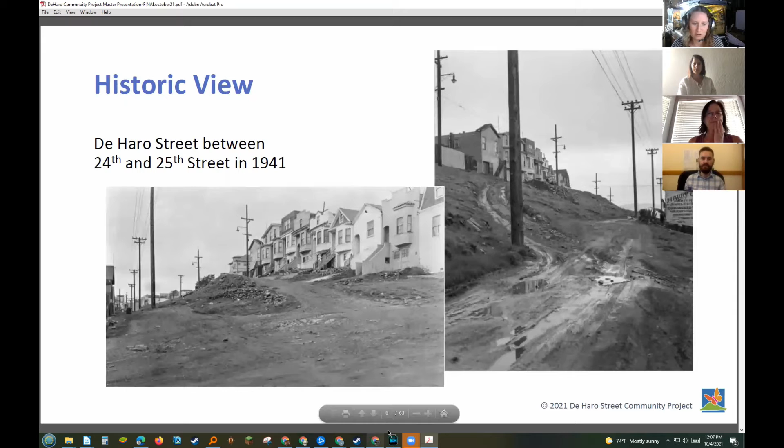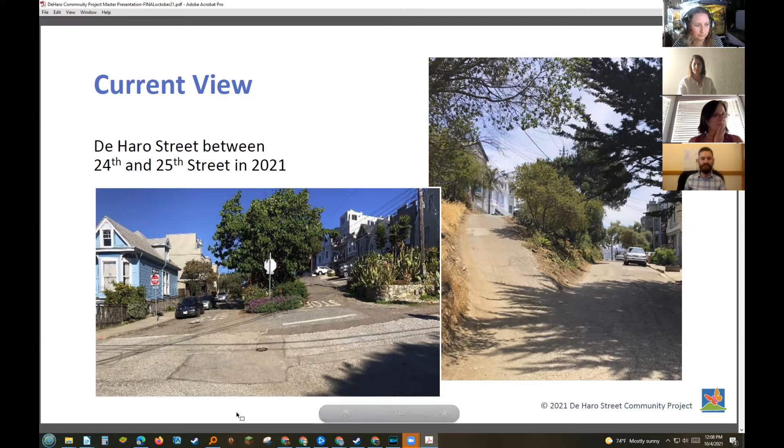So our holistic vision, multi-phase project, in collaboration with our steering committee, comprised, well, you know all of that. We've worked with Terrain Studios to develop a multi-phase master plan. Each of these 4 phases is independent and autonomous in scope and addresses key improvement requirements. All 4 phases are in service of a holistic goal of creating a seamless, interconnected green belt that serves the larger neighborhood, fostering a more beautiful and functional pedestrian-friendly community.

Phase 1 is what we are applying for the Community Challenge Grant for, and it addresses erosion and drainage issues while significantly enhancing the beauty and sustainability of the hillside, which also connects Upper and Lower Haro with new stone face steps and a gravel path. Elements include drainage, retaining structure, decorative gravel, low flow irrigation, initial drought tolerant planting, and landscaping.

And then the other phases, which we would be applying for next year, phase 2 anyways, continues to improve the median and is also a community challenge grant. Phase 3 and 4 address more infrastructure issues, and we'll have to work with the Department of Public Works on that. Ultimately, the goal is to complete this green belt walking pedestrian path, and also at the same time makes Upper and Lower Haro's accepted streets, and sort of fosters this beautiful entrance to the Starr King open space.

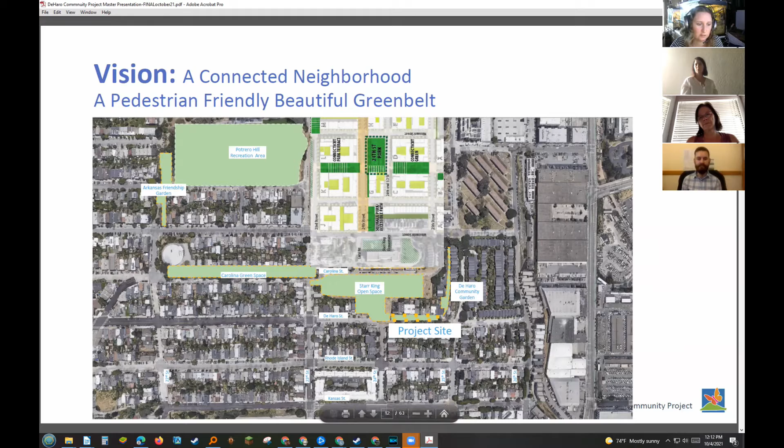So it's this beautiful circular walking path, which we want to make even more functional with our project. And safe, I would add. Yeah.

Here's an overview of the master plan. Terrain Studios created this beautiful diagram of what we're suggesting, which ultimately over the course of several years would make Upper and Lower Haro both accepted streets by dealing with the width issue, the sidewalk issue, and the ramp, which is extremely unsafe and narrowing by the day, especially now that the city has made Lower Haro a one-way street. So traffic is being forced on Upper Haro, which is further degrading the roads. The ramp is visible in the background here.

Terrain's vision was to do what was originally planned in the city planning, which is to carry it through to 24th Street. So that was the vision that we came up with after a year of research and brainstorming.

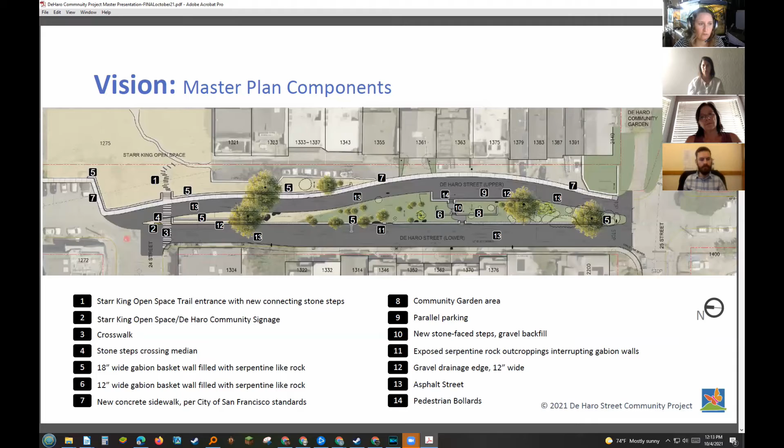But these are all 4 phases of the plan. For phase 1, which is what we're applying for this year, we have in yellow the Lower Haro beautification project, which essentially involves what we're going to talk about. Then the second phase next year would be further terracing and planting, phase 3 would deal with the lower street, and phase 4 would deal with the upper street.

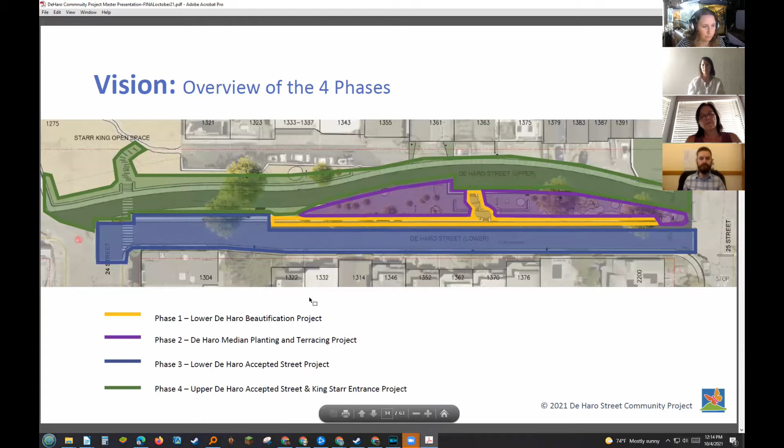So phase 1, the components are putting in gabions to retain the hillside and provide a wall that will hold back the soil from falling into the street, which makes the street narrower. But it's a wall that allows water to permeate through to encourage proper drainage. Also, the steps would be started so that we can access the different levels of the street and create a beautiful walking path.

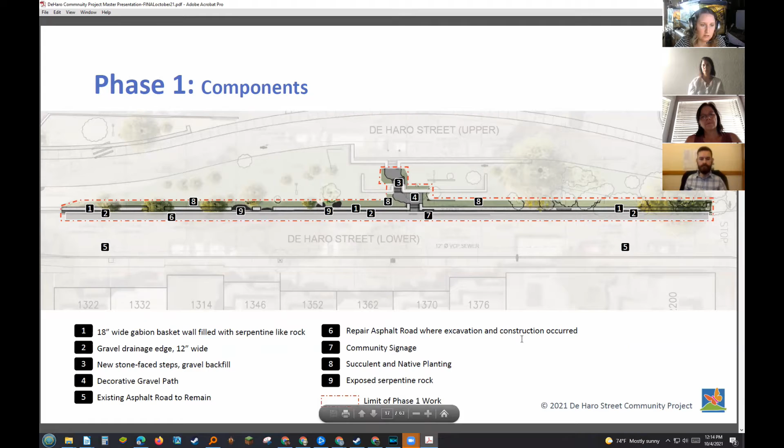So those are some of the issues addressed by phase 1: dealing with the landscaping, dealing with the irrigation, which I don't think we talk enough about in this presentation, because our intention is to apply for the PUC irrigation grant - I can't remember the name of it at the moment. But that's a major part to this, because we can't keep any of these plants alive, the plants die and the soil erodes, and then our street gets narrower and narrower, and it's just unsafe. So these are some of the issues that are going to be addressed by phase 1, which we are hoping to get the community challenge grant for this year.

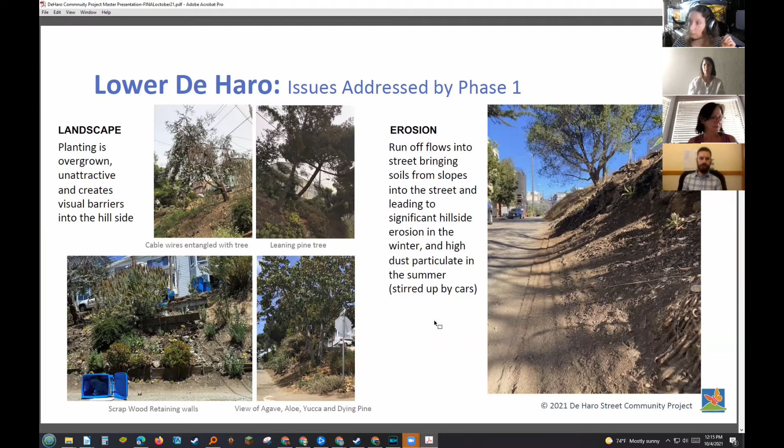You can see these are just some highlighted pictures of why we need the gabion wall, because there's this continuous erosion of the slope. And if we ever do get rain again, it makes for a pretty difficult street to drive on when you have this mud that covers half of it.

Quick question on that photo, sorry. If you go back to the photo on the right, if you had that gabion, you kind of got rid of some of the erosion, some of the dirt. Under that dirt, is that asphalt or concrete, or is some of that just dirt and hasn't been paved?

So the really interesting thing is that when the street was paved decades ago, there is more of the street underneath this soil flow. Just out of curiosity's sake, we've dug it back, and so there's definitely a road lip. Our intention with the gabion is we're going to go back into the hillside, so where this board is in this photograph, that's about where the gabion would actually start. Then at the base of the gabion, there would be about 12 inches of gravel drainage, and then the road would start, because we need to have the drainage so that the water is diverted and doesn't just flow over the road. So that's great though, too.

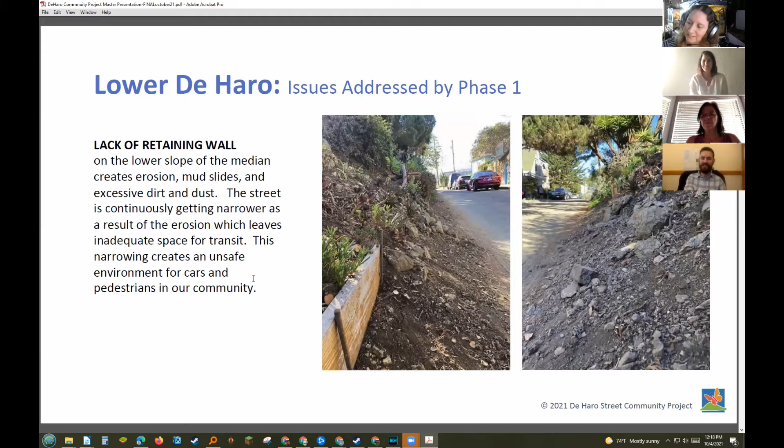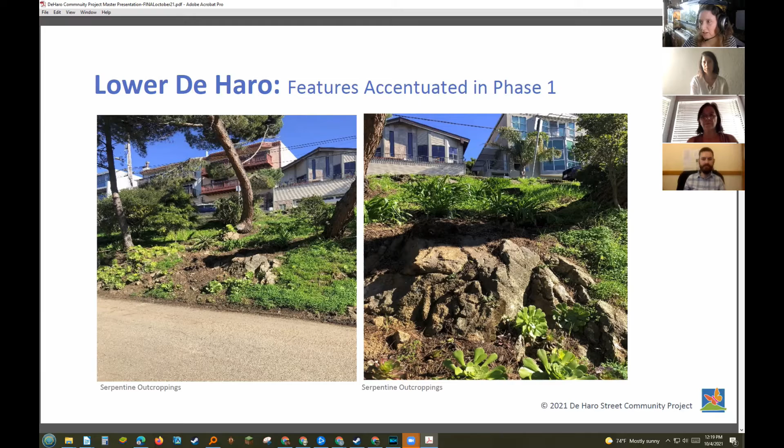So a few of the features, we've got this beautiful serpentine rock that outcrops from the hillside all over the place here. We've taken that into consideration in our design so these features will be accentuated and not lost. The overall vision is for something like this, where we have a safer road and safer pedestrian and bicycle traffic, where everybody can enjoy the beautiful green space we're lucky enough to have. There are fewer and fewer green spaces in San Francisco, and we should bring it to its potential so we can all enjoy it.

The benefit to the gabion, in addition to allowing water to permeate it, is you can also plant in it, so after a couple of years it's going to look so beautiful. This is a mock-up simulation that Terrain provided of what we're potentially looking at: safer, wider streets, new planting and access path, with the existing curb and sidewalk remaining.

We went through a lot of iterations of this project, and in a few of them we were taking away parking spaces, but we came to the conclusion that we don't want to take anything away from our neighbors, and we don't want to give anything up. We just want more. So this project, as it is right now, doesn't take away—it just gives. That's one of the things we're really proud of.

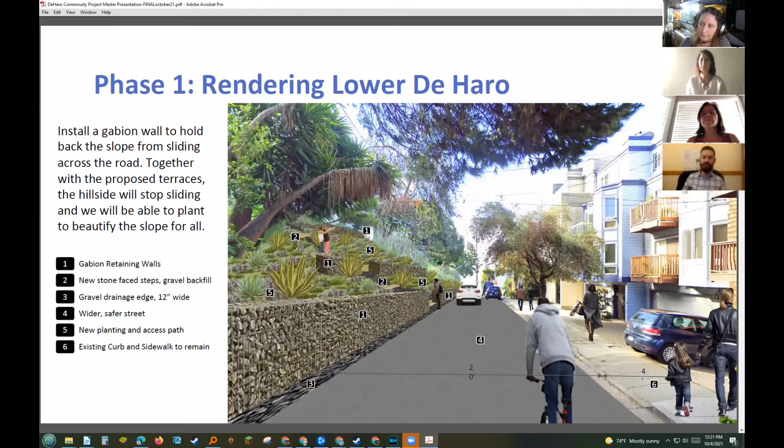Sticking to the rules of it being a one-way street, it's easier to widen—it takes up less of the median. So we would have it be 12 feet for transit, 8 feet for parked cars, 4 feet for pedestrian. Terrain's been very clear that that's what we have to hit to become accepted, so this hits that. There are some diagrams later on that go more into detail on that specific issue.

So here's our budget, taking into account the CCG grant and the fact that we have to match 40%, which is scary. The budget is at 139,000 just to do this. Of course, the CCG grant only allows a certain amount towards construction costs, so that's also something we took into account during the division of phasing.

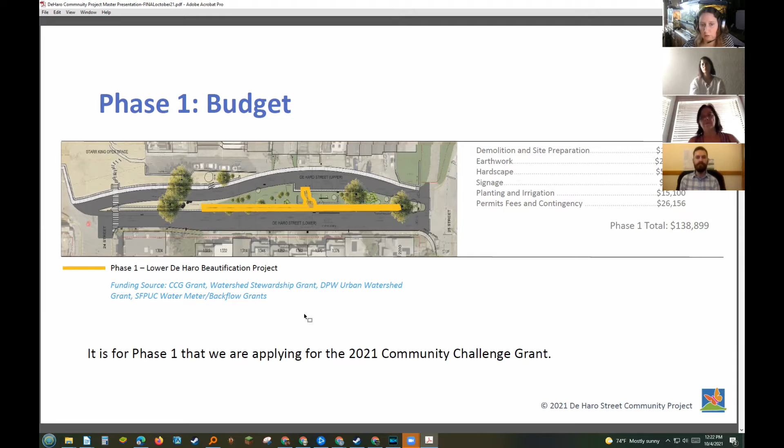In some ways, it would be more economical to do the gabions all at once, including on the upper street and in the center, but we just can't make the numbers look right while still qualifying for these grants. That's why we've broken it up the way that we have.

Again, this is our presentation for the CCG, so it's in that format, but we can just sort of jump ahead. Get my cat off the counter again. There we go. Yeah, you don't have to.

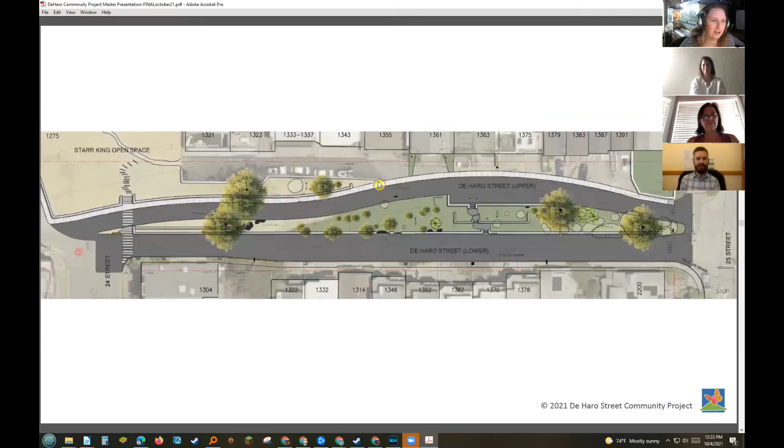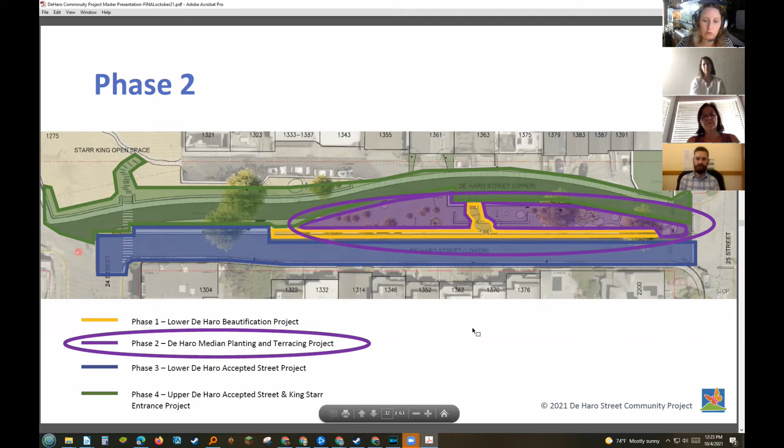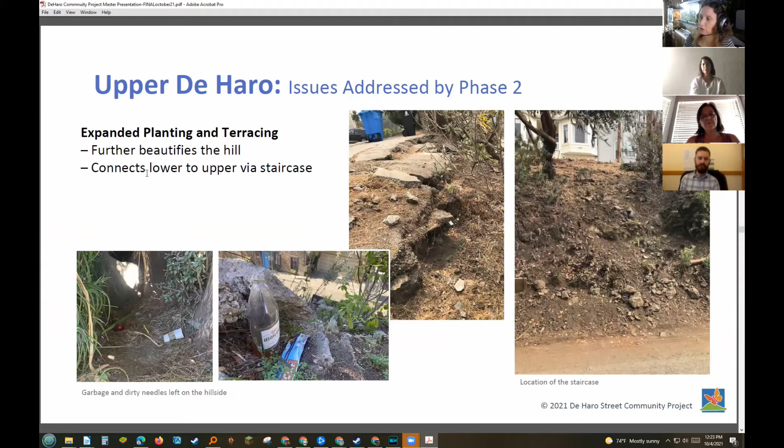Okay, so phase 2 is interesting. Again, dealing with phase 2, we didn't want to just talk about phase 1 in our proposal. We want them to have an idea of everything that's coming down the pike so that they can see how considered this whole development has been. Phase 2 is also a project we would be applying for a CCG for, which further beautifies the hillside and finishes the stairs all the way through, while also dealing with the upper De Haro erosion issue and the garbage issue.

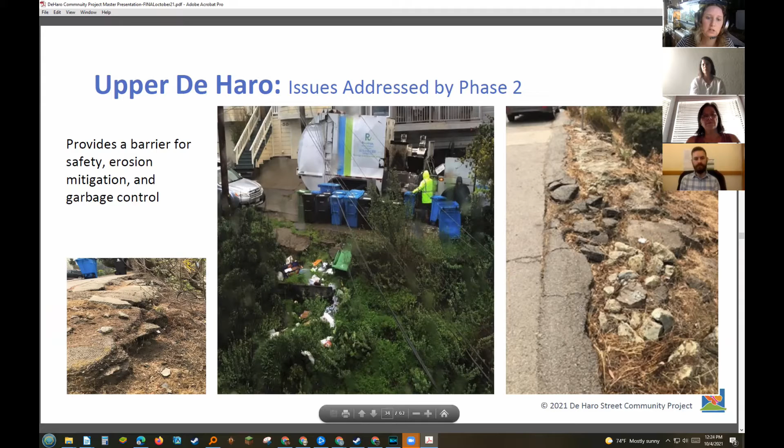Here's a rendering. Originally, when we started working with Terrain, they had this beautiful concept of using cobblestones, because 24th and De Haro is one of the last cobblestone streets in San Francisco, and it's just beautiful. In their original plan they included the cobblestones, but because of our budgetary requirements we had to nix that aesthetically pleasing but very expensive part of the project. But there's no reason we can't do that down the line if we somehow had lots of money.

Street repair becomes easier with pavers because you just pick them up. These cobblestones are actually pavers, yes, and the street would be easier to repair and maintain with pavers because you just remove them.

In any case, the rendering of Upper De Haro, we would have a short retaining wall, gabion wall, all along this edge, as well as a street wide enough to be accepted, and we would have to install sidewalks in order to be an accepted street on Upper De Haro.

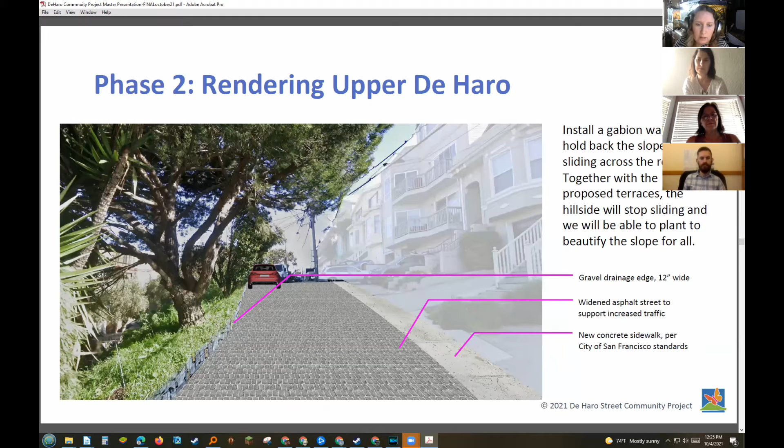So the gabion wall would hold back the slope. Here's our gabion wall up at the top, as you see it's really only at the worst of the area, where the street is really collapsing. The idea is that backfilling underneath the road and installing the gabion would help prevent that erosion.

And we would deal with the mid-level gabions as well, which terraces the hillside to make it more beautiful and more accessible for plantings and the like.

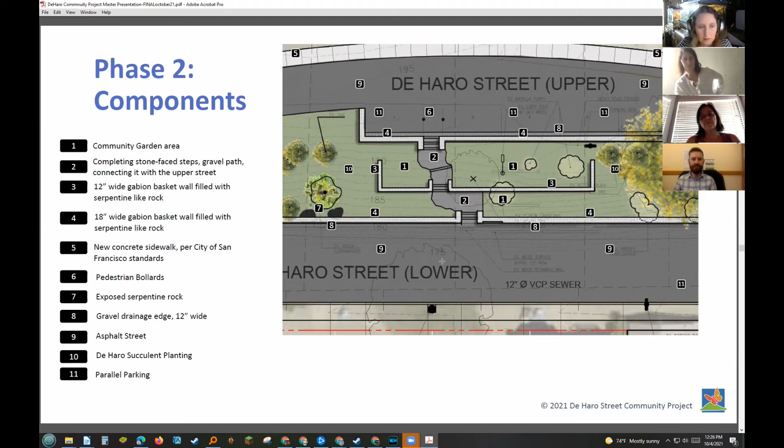We would install a couple of pedestrian bollards to keep people coming up the steps from being hit, and to prevent cars from parking right there and blocking it. So that's an important part of phase 2: safety for our community.

So this is the budget for phase 2, which encompasses the purple areas. Keeping into account the 40% match and the limited percentage of funding that can go towards construction, we have our budget at 105 for that part of the project, which we would request a CCG grant for.

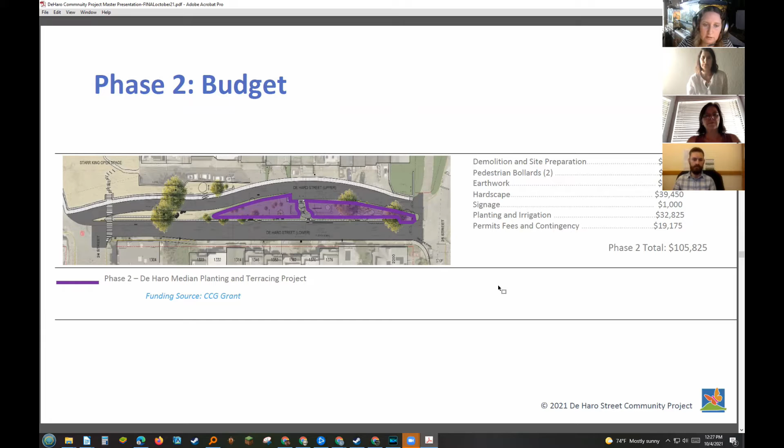Looking at the big picture, the issues addressed in phase 3 and 4 are the unsustainable infrastructure we have, like the edge of the asphalt being unsupported and in poor condition and eroding down the hill, as you know from meeting with us so many times, Abe.

This would address the lack of gutter at the base of the slope, which allows runoff onto the road. Current street widths would be addressed in phase 3 and 4. Right now lower De Haro is 16.5 feet and upper De Haro is about 12 feet in width. These would be addressed during phase 3 and 4 so that we could be under consideration for being accepted.

The other part preventing us from being accepted is the dissecting portion of De Haro, this crazy ramp that's quite narrow, so much so that garbage trucks, fire trucks, and emergency service trucks do not want to drive on it because of the liability and the collapsing edge. Because of that, that's really part of stage 3 and 4 that needs to be addressed, as well as a major factor preventing us from being accepted, because it's a public safety issue.

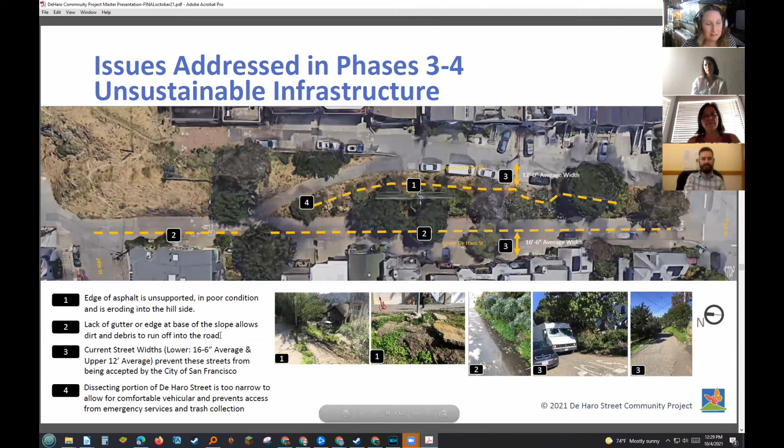It's scary. The people on Upper De Haro have limited access to emergency services because the vehicles don't want to go up there. Recently we had a situation where PG&E had to come out because construction at the end of De Haro, I think it's 1321, hit a gas main, and that was really scary because the fire trucks could not get up there. Luckily it worked out, but still pretty scary, and that's something we want to take into consideration in our plan.

So this is sort of the master plan idea. This is the ramp currently, and instead it would go along here, extending the median out to 24th Street. One of our neighbors expressed concern that she'd be looking at roadway out her window instead of the unplanted slope she currently looks at. But in actuality, because this median would be brought all the way to 24th Street, there would be quite a bit of green, trees, and plants that could obscure the road.

Anyways, those are all solvable problems in a plan that ultimately makes it safer and more beautiful for everybody.

So stage 3 and 4, here's the other end of De Haro towards 25th Street and what it would look like. You see the street is wider, the sidewalk is there. The drivable surface has to be 12 feet, and the sidewalks have to be there in order for it to be accepted. So this is how we are suggesting solving this.

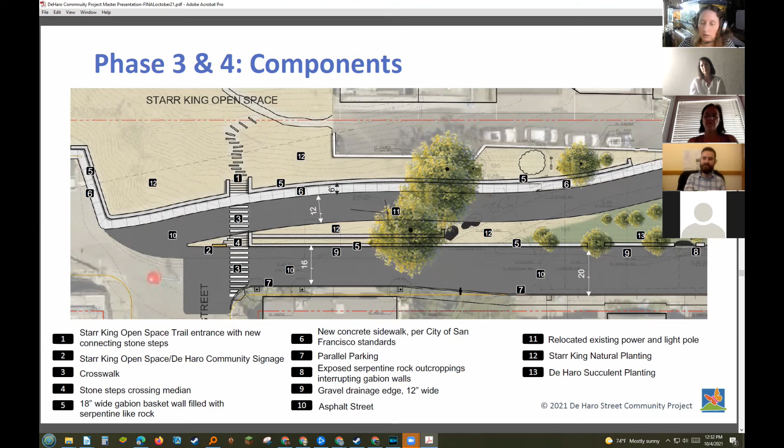So it does create a much more beautiful entryway to Starr King, both this footpath as well as the stairs. And we work directly with the Starr King Open Space Board of Directors, and they're in full support of this plan. Great, yeah, we have a letter of support from them that we're including in this packet.

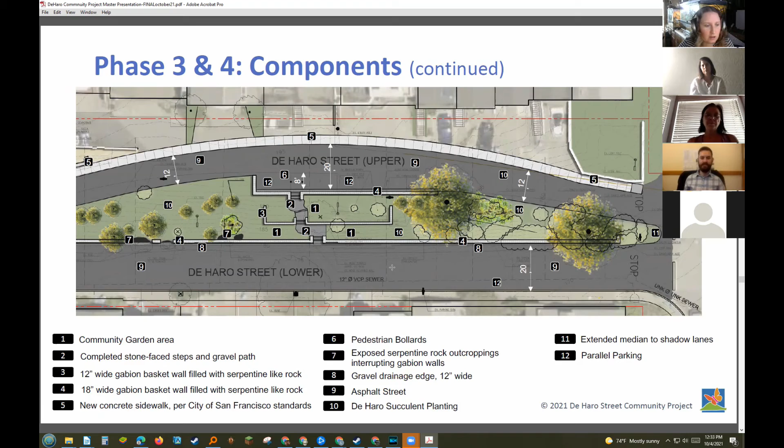So again, this is the other side. The budget is a little more intimidating for us. So Terrains, when they proposed this, suggested looking into the mayor's grant, the watershed stewardship grant, that's a tongue twister, DPW urban watershed grants, and public works. We have no idea how we're going to get to this phase and how we're going to fund it when we get there. We know there's going to be a lot of public notification and involvement before any of these phases can really happen, but we wanted to take them into consideration because we didn't want to do something in phase 1 that made it impossible to get to phase 3 or 4. So this is our proposal.

So do you have any questions before we go on to some of the other diagrams? Not yet, just want to say this presentation is great, it's incredibly professional, I'm really happy about it. Thank you. And what about, I think we're asking your suggestions, so we have this grand scheme, we'll get phase 1 and 2 done. Then we need Mandelman's support, the Board of Supervisors support, the city support to do phase 3 and 4. So at some point we're going to need to know how to go about that.

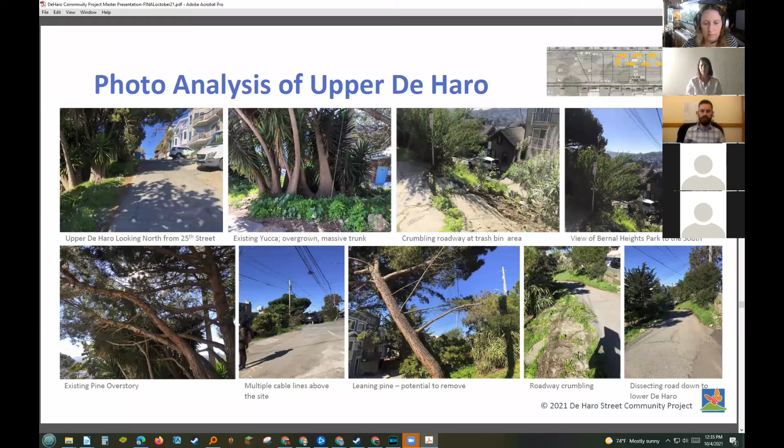So this is just a photo analysis of Lower De Haro and then a photo analysis of Upper De Haro, just so that the committee has some idea of what we're talking about during the course of our project and why.

Including the beautiful cobblestone streets on 24th and the rocky outcroppings of Starr King. And this is this crazy path from 24th Street, it's really impossible for anybody over 20 or 30 to go up this way. It's a lot steeper than it looks in that picture. It's true, yeah.

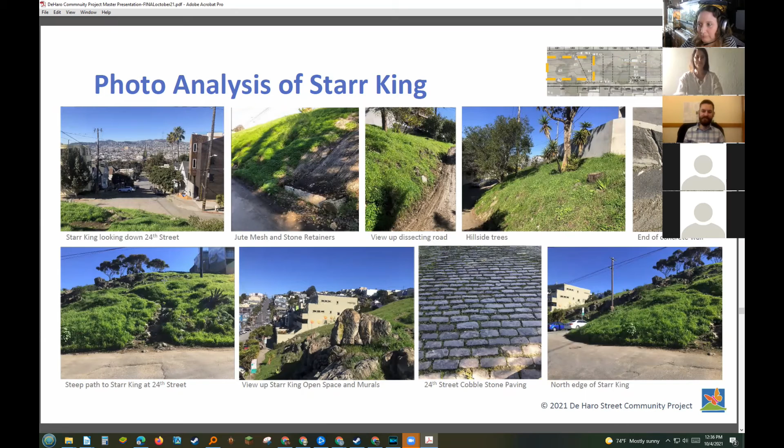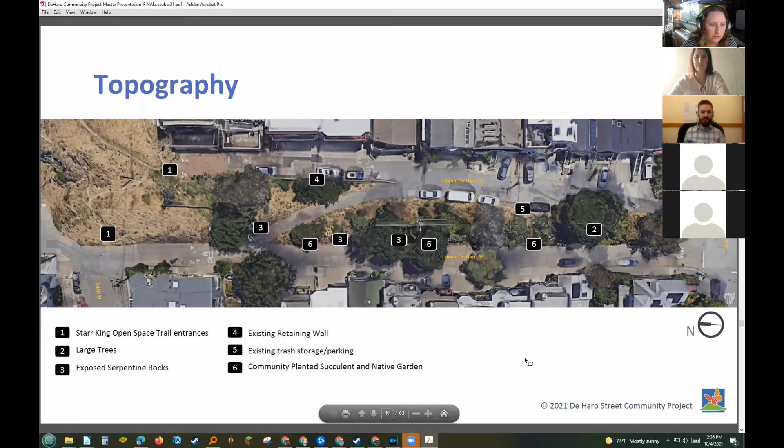Yeah, so this is just a topographical map to give you a little bit of reference of where we're at right now.

It's crazy. Cars have to back up to the ramp in order to get past. And the ramp is experiencing a huge increase in traffic as well. And there's already broken pavement. It's getting worse quickly, so we're really hoping to mitigate this somehow as soon as possible.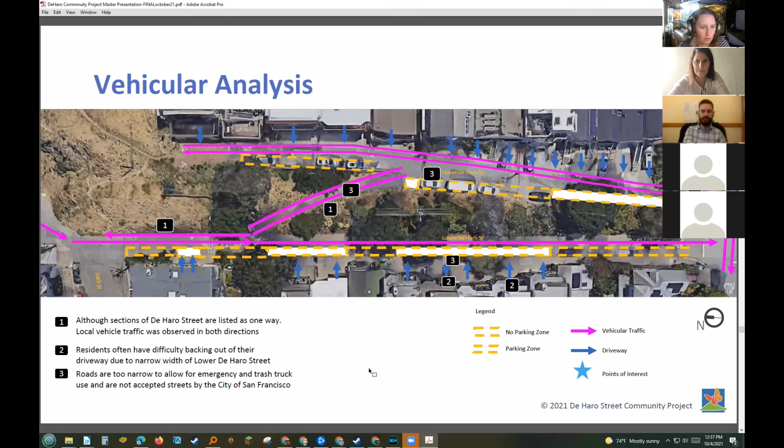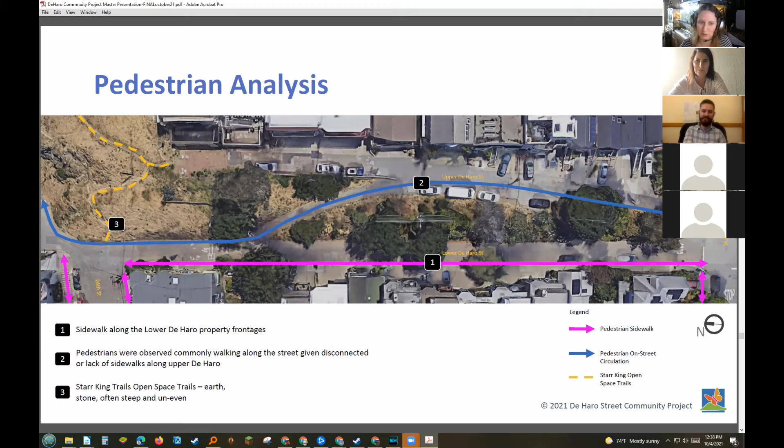So pedestrians can walk anywhere they want right now, except on the median, which is so ridiculous, and we are eager to also rectify.

So the street width — San Francisco has a street width requirement of 20 feet for becoming an accepted street. As it becomes accepted as part of our overall master project, each phase of our project takes this into account. So that 20 feet breaks down to 8 feet of parallel parking and a 12-foot driving lane.

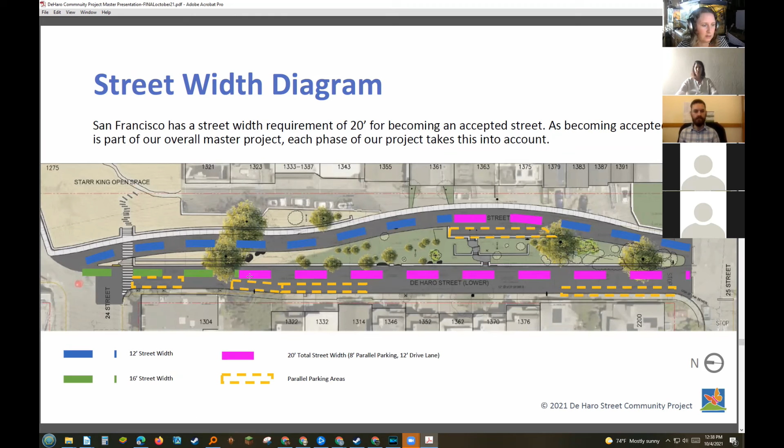Right now, Lower De Haro, for the most part, is already 20 feet, except for this area beyond the ramp. That's kind of how we're proposing Upper De Haro to be one way. It's similar to how Carolina Street is now — one way in one direction and one way in the other. That way it keeps traffic flow going. It's just very simple — it doesn't take a lot of explanation. I think you can see the arrows.

Yeah, it's very simple, but very complex in that it would require a pretty big retaining wall. It's gonna require us extending the street out, down to 24th Street, as that one diagram shows.

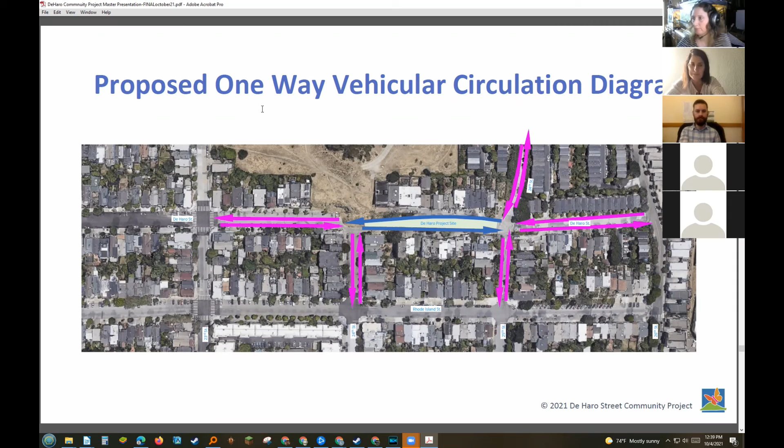I would emphasize that all of that land is DPW land. It is not Starr King open space. Where the road is going to go into is DPW land. You're correct.

Okay, so the wall height diagram is pretty interesting as well. It just shows how high this gabion needs to be in order to do its job. For stage one, or phase one, the majority of what we're going to be building is in the 3.5 to 4.5 range. It's an interesting diagram to study.

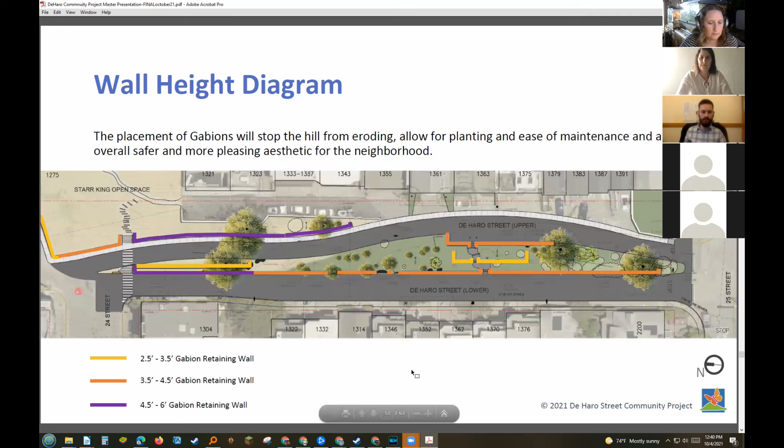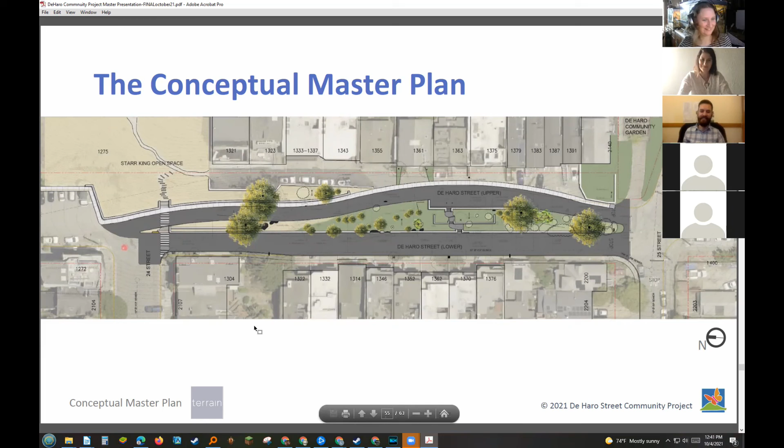So here we just, again, have the overall master plan at the end of the day, or the end of the 10 years, or whatever it is — or 20 years, or 5 years. Let's make it 5 years. Wouldn't that be awesome? That would be great. I like that. Optimistic. Yeah, with its various components highlighted here.

Do you all have a sense, for each phase, assuming the money comes through, of what the construction timeline looks like? No, we haven't gotten into that — I have personally no experience with city or construction projects on this scale. I would think by the time we get the money from the grant, the CCG grant, that would probably take — if we can get started pretty quick after we get the money — I'd say 6 to 8 months, and then we're applying for the second grant. If we have all of our ducks in a row and get the permits in place that we need — a lot of it doesn't need permitted work because of the height of the gabion wall.

The nice thing is Terrain will work closely with us on keeping everything on course. They've been doing it on the Carolina Street project. I think Scott, when they came up with this conceptual master plan, just hit a home run — none of us even thought about this, putting in the sidewalk on the upper part. We think it's stunning. What do you think, Abe? I love it. I'm anticipating this will take a bit of time to get to the end of these 4 phases, but it'll be really exciting when we get there.

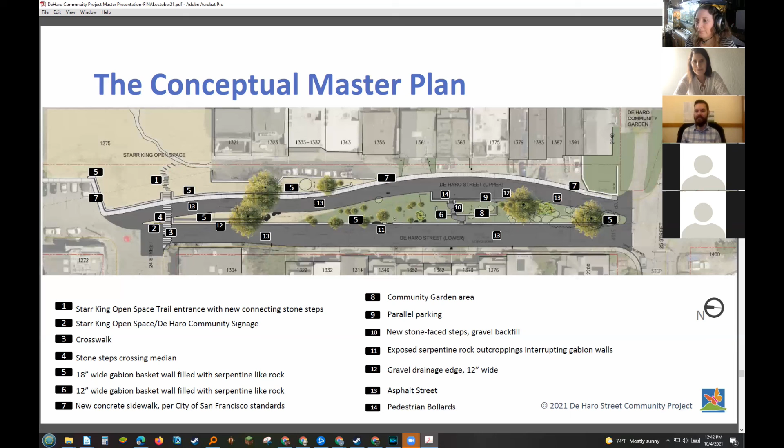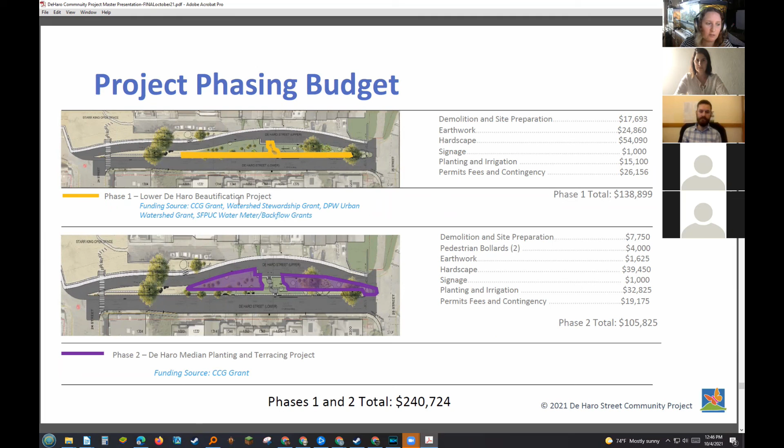Right. Okay, so again, we reiterate the budgetary issues in our CCG grant, because phase 1 and 2 are hopefully CCG funded, as well as the PUC water meter grant. Then stage 3 and 4, phase 3 and 4, of course, here it is again.